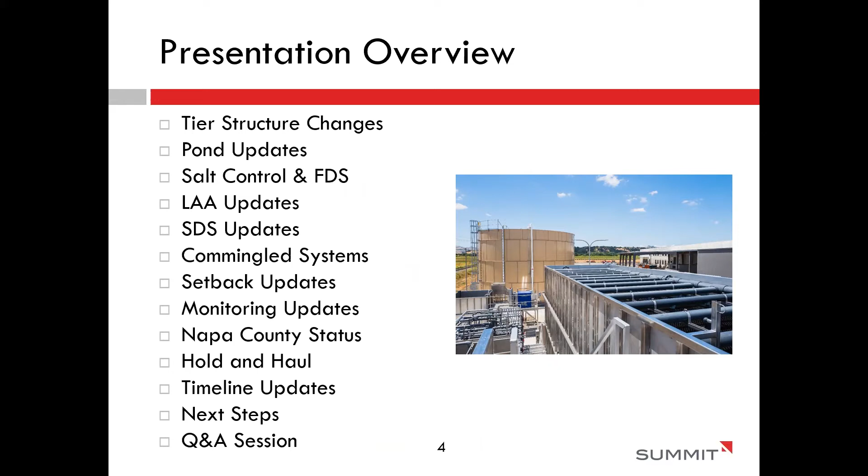Presentation overview. What I'd like to do, because we did go into detail on the draft order at our last webinar, I want to talk more about what the changes are since the July draft, the changes that were presented in the December draft, and the subsequent changes before the hearing.

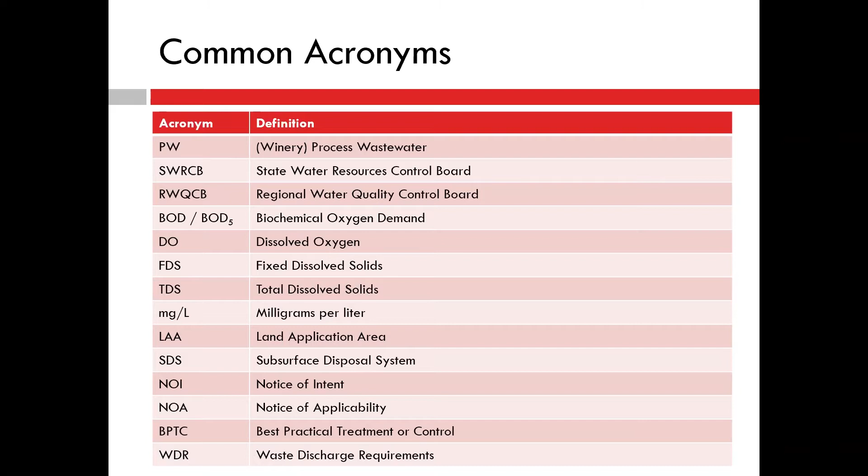So as I was saying, most of you are probably familiar with some of these acronyms. If not, don't worry about it. We can have a follow-up conversation. Not trying to complicate the matter, but using the acronym is oftentimes a lot easier than saying all of the words involved. Okay, so tier structure.

There were some modifications to the tier structure, and what they called previously de minimis is now considered exempt. If your facility is considered to be exempt, you do not need to apply for enrollment in the general order. So what facilities qualify for exempt status? That would be a facility that produces less than or equal to 10,000 gallons of processed wastewater per year.

What is processed wastewater? The state is considering processed wastewater to be any wastewater associated with the winemaking process that's collected and sent to your processed wastewater system. That can be inclusive of stormwater that is also collected and sent to your wastewater system. So it's a combination of any water, wastewater that is collected and sent to the wastewater system.

So one thing we're talking with clients about is adding flow meters, so you know how much wastewater you're actually sending to your wastewater system, and what that data looks like, because the state, especially for the higher tier facilities, is going to be looking for actual data versus theoretical data. And it's always more accurate. Oftentimes the theoretical data can overestimate what your actual process waste volumes are going to be. So I'm encouraging all facilities, if they can, to install flow meters. And if you need assistance with where to locate that flow meter, please ask us.

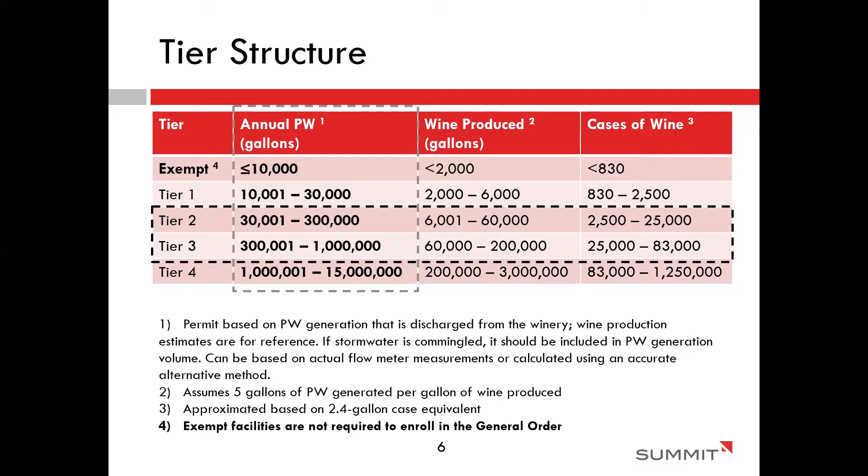All right, so reiterating from last time, nothing's really changed here in terms of what the state is concerned about. Primarily, they're looking at waste discharge to land. So they're concerned about excessive BOD loading, biochemical oxygen demand. So if you're not keeping your wastewater system in good biological health, you can have nuisance odors or anaerobic conditions, and they don't want that. If there's excessive BOD in the waste discharge, you can mobilize trace metals in the soils.

They're also concerned about nitrogen levels and nitrate leaching into groundwater. So nitrate levels within winery waste is not a huge concern for the state. However, there is ammonia, there is nitrogen in winery wastewater. So they're concerned that once that wastewater is discharged to the soil, nitrate will potentially leach into the groundwater, and the limit that they've proposed is the same as what is imposed for drinking water, a cap of nitrate MCL of 10 milligrams per liter. So that's their focus on nitrogen.

They're also concerned about salinity. It's become a hot topic within the state. Primarily fixed dissolved solids, because the TDS consists of volatile and fixed dissolved solids. Volatile dissolved solids are biodegradable, whereas fixed are the salts, and they're not biodegradable. They'll accumulate in the soil, and they're concerned about the impact of the salts on the soil and the hydraulic conductivity.

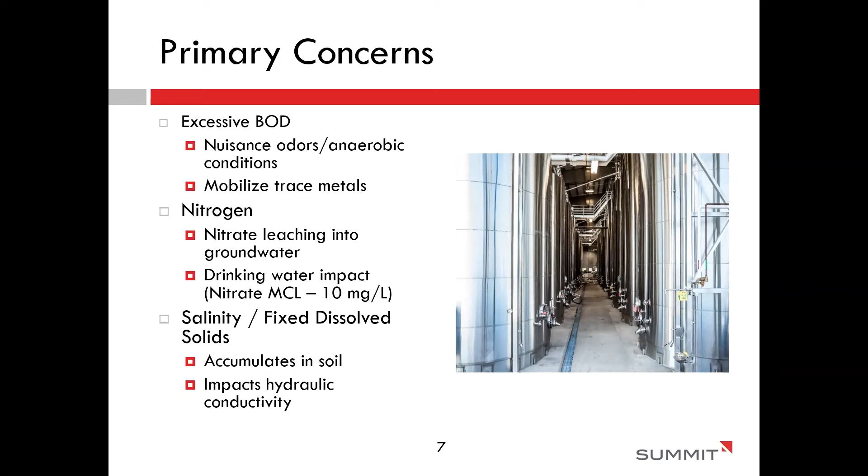Okay, so ponds. Every facility has either ponds, a package system, or a leach field system. And so this general order is going to apply to all of you differently. So for ponds, like last time, it was consistent through the draft and adopted order. They want to understand the sizing of your pond. What is the capacity of your pond? And what is the land application area that's required based on your process waste volume generated?

So for existing ponds, they're not as concerned with those for tier 1 and tier 2 facilities needing to meet the new criteria. Those ponds are going to be approved as is from a capacity and liner standpoint, but they are going to keep an eye on groundwater monitoring just to make sure there isn't a degradation happening to groundwater. If there is, then they might impose more restrictions. But to start, for tier 1 and tier 2 facilities that have existing ponds, the requirements are going to be more lenient.

For tiers 3 and 4, the state is going to require an evaluation of the liner to make sure the permeability isn't higher than what's allowed. And they're going to want to make sure that the ponds are sized to meet a set of criteria, mainly the 100-year storm event. So for existing facilities that have existing ponds, we would go through the process, as part of the enrollment application, to look at the capacity of the ponds and to demonstrate that the liner meets the permeability requirements. For new ponds, the state has requirements for tiers 2 through 4 that they're sized to meet a 100-year storm, and that they meet the liner requirement prior to construction.

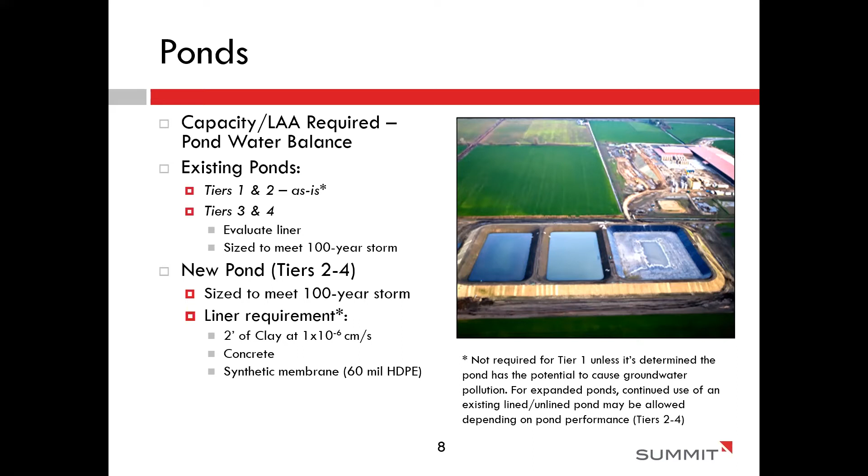One thing that I would like to point out too, that I should have on the previous slide, is that the state acknowledges that if there are too many facilities that would be categorized as a tier 1 facility and it's in a concentrated area, they could move you into the tier 2 category. We don't know what their criteria is going to be, what densely populated means, but that's something to be aware of that we'll be in communication with the state in regards to.

So some additional pond considerations. This order specifically prohibits discharge to a spreading basin, rapid infiltration basin, etc. They're solely looking at wastewater ponds. If you have any of those other types of systems, that will require an individual waste discharge requirement or enrollment specific to your facility. The other thing is the state isn't looking at a wastewater treatment pond any differently; they're looking at a holding pond or an equalization pond just as they would a treatment pond. They're going to impose the same requirements on any type of pond that's holding wastewater or effluent.

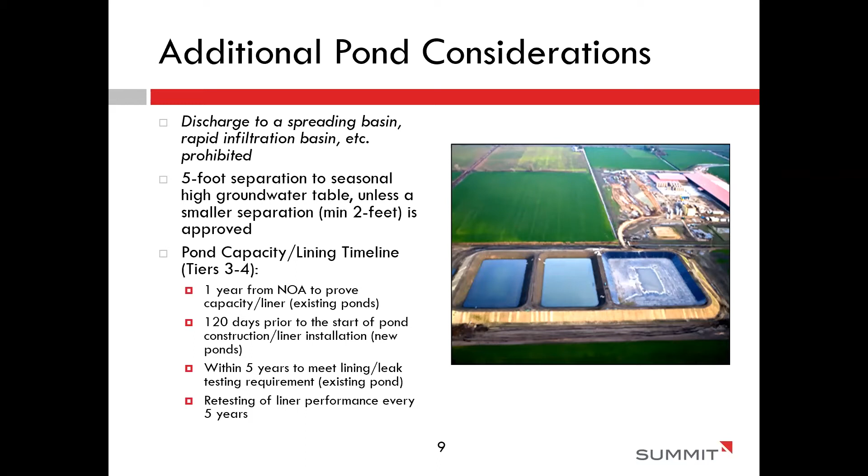Within 5 years, facilities need to show that they're meeting the leak testing requirement for existing ponds. And then for all facilities, you have to retest the liner to show that you're meeting the leak testing requirements every 5 years. That can be quite costly, so it is something to consider when you're looking at your operating and maintenance budgets. One other thing that I skipped over: the state is also going to be looking for a demonstration that you have provided 5 feet of separation from the bottom of the pond to a high groundwater table, unless a smaller separation, minimum of 2 feet, is approved, and that'll be done on a case-by-case basis.

So from your pond, from your package treatment system, then what happens? You discharge to what they call a land application area. So based on what was adopted, there is no specific hydraulic limit. And so this was one concession, because they used to have a hydraulic limit in there. They're just asking that you demonstrate that you are providing good irrigation practices. And that's up to the engineer, whoever is helping you put together the application, to demonstrate.

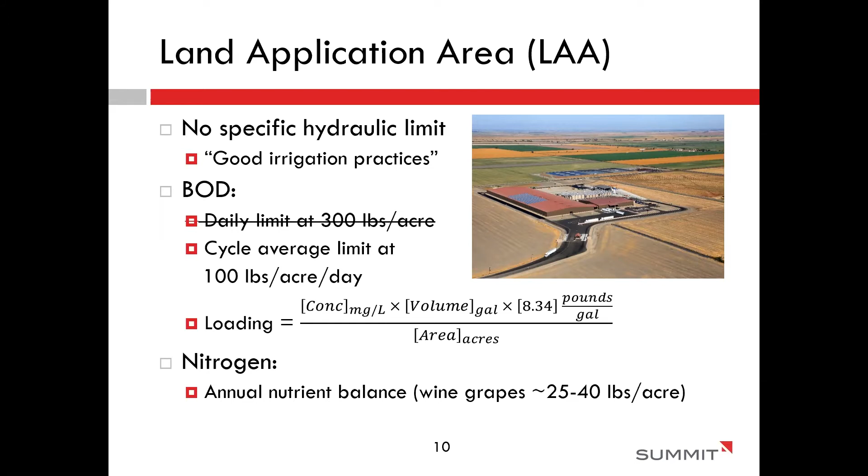For the land application areas, they're also looking at your biological oxygen demand loading. Previously in the draft order, they were looking at a daily limit for BOD, but they've removed that. And now they're just looking at a cycle average limit of 100 pounds of BOD per acre per day. So this was one concession that they made. They're also looking for you to demonstrate that you're applying nitrogen at agronomic rates, which is going to be dependent on whatever crop it is that you're irrigating. And we'll be able to demonstrate this through an annual nutrient balance that will be a part of the technical report.

So facilities that don't have ponds, they don't have package systems, they're not worried about surface disposal. A lot of facilities have leach field systems, or what the state is referring to as subsurface disposal systems. And this is a hot topic as well, because a lot of facilities have commingled systems. They aren't having to do any pretreatment. And so we'll get into what is going to be required for those facilities.

So in general, all subsurface disposal systems are required to demonstrate that you have a hydraulic loading limit of 1 gallon per square foot per day. This is kind of getting into the weeds of things, but this differs pretty heavily from what the local regulatory requirements are, at least for Napa, Sonoma County, and many other county jurisdictions who typically oversee the design criteria for these systems. So that'll be something to look at.

And if you have any design information on your existing leach fields, that would be something we would want to confirm: what is the actual hydraulic loading limit in how the system was designed, and does it meet this new state requirement? Another big item related to SDS systems are the effluent limits. And this specifically applies to tiers 2, 3, and 4. Tier 1 is exempt. Effluent limits that are being imposed are BOD, total nitrogen, and TSS. As of now, those limits have been imposed on SDS systems.

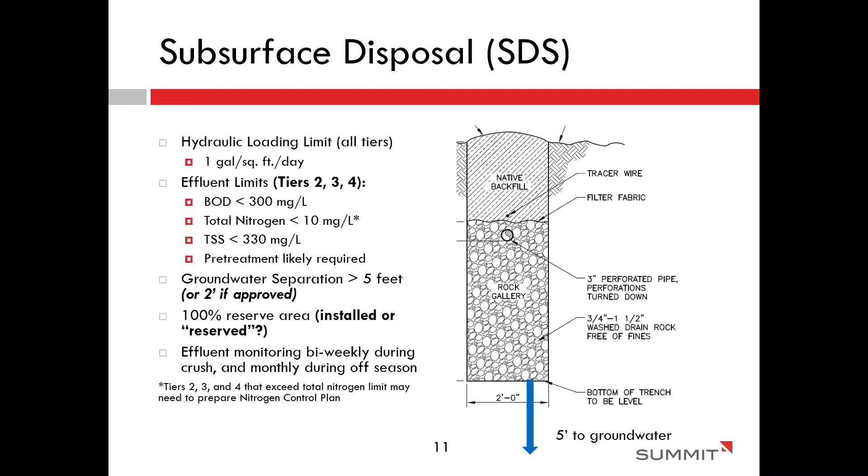Okay, so commingled systems. A lot of facilities combine their process wastewater with their domestic wastewater. And this can continue to be allowed for existing and new. This was a big concession because it was not allowed in previous drafts. But process waste must be pretreated before you commingle and the two waste streams are discharged to the subsurface system. That will be a requirement. The other requirement that is a big deal is you will need to demonstrate that 5 feet of groundwater separation standards will be met. They will not allow the reduction to 2 feet for commingled systems.

If you do want to proceed with continuing to utilize your commingled system, the discharger must also submit technical justification that demonstrates that the subsurface disposal area is appropriately sized and designed. This is somewhat vague. They don't give the design criteria. That will likely fall to the engineer to demonstrate sufficient criteria for that subsurface disposal design.

The other thing that they noted for commingled systems is that dual coverage will be required. So you will be required to enroll in the general order as well as have a septic permit through the local authority. So the alternative to commingling, or pre-treating process waste, combining, and then discharging a commingled waste stream, is to keep those waste streams separate.

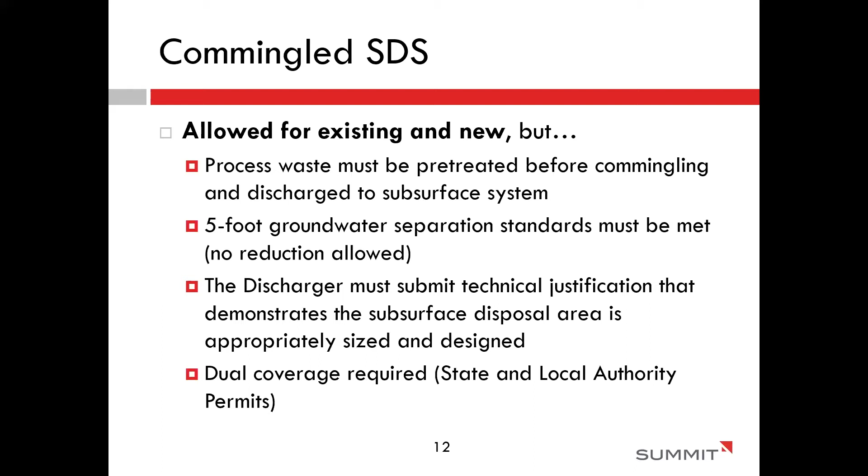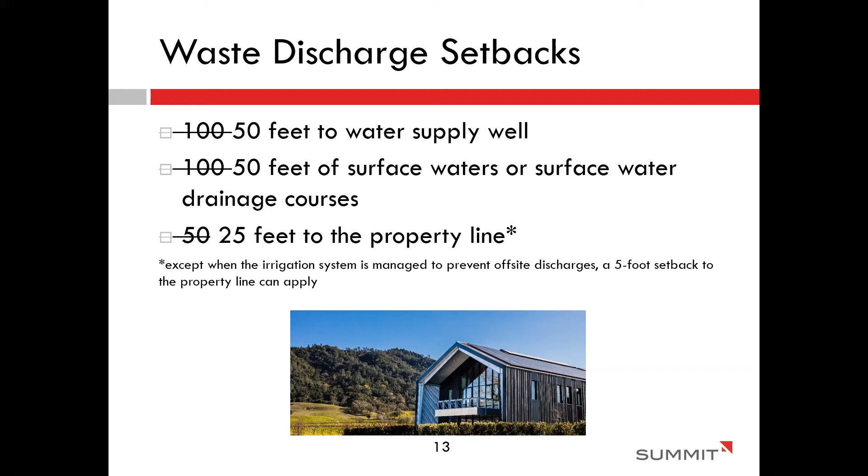A few other concessions in regards to waste discharge setbacks. They reduce the setback for wastewater disposal from 100 to 50 feet to a water supply well and to surface waters or surface water drainage courses. They also reduce the setback to a property line from 50 to 25 feet. And if you can demonstrate that your irrigation system can be managed such that there won't be any runoff and you can keep everything on site, they will allow a reduction to a 5-foot setback to the property line.

Salinity. Salinity is a big deal, like I mentioned earlier, and the monitoring of salinity applies to land application areas, so surface disposal as well as subsurface disposal systems. One other item that was a huge topic of discussion: originally they said you could not discharge water softener, RO backwash, boiler blowdown, but they've since modified, and what was adopted is they're only prohibiting the discharge of water softener backwash into the process waste system or to land discharge. RO backwash and boiler blowdown is allowed.

What they're looking for there is they don't want any additive salt systems or additive salts to be added to the process waste stream. They will allow any processes that are just removing salts from the water sources. So how are they imposing these salinity requirements? What the state's looking for are the fixed dissolved solids levels. And what they've outlined is that you're meeting the threshold. So what is the source water FDS level, or the salt level in the source water, your well water, plus 320 milligrams per liter? Does your effluent meet that threshold?

If not, they will require a salt control plan that you will need to implement in terms of source control or other measures to demonstrate how you are going to be able to meet that threshold. So what does this require? Well, you're going to need to demonstrate what the FDS levels and TDS levels are in your source water, because currently you're likely not monitoring that. So my recommendation would be to get a good handle on what those levels are in your well water so that you know where you stand in terms of meeting that threshold or not.

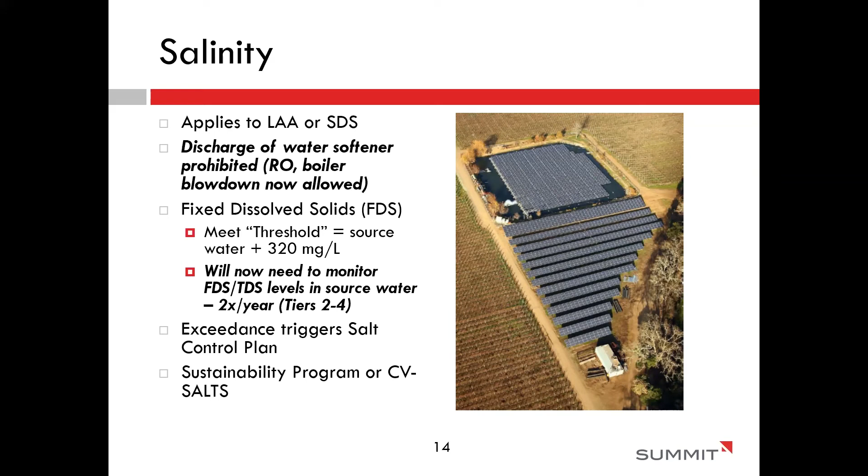Additionally, like I mentioned, the exceedance of that threshold triggers a salt control plan. If you are involved with a sustainability program or the CV-SALTS program, there could be some concessions in terms of what salinity requirements you need to meet.

Monitoring updates. So a big part of this general order is there is a lot of monitoring that's required. So this is time consuming. It's a huge expense for facilities. So it's something that you should be aware of and plan on, as it will impact your budgets. Overall, some general sampling and monitoring requirements are winery effluent. So before it goes to treatment, facilities that fall in the tiers 2 to 4 categories will have effluent monitoring requirements, a number of constituents you'll need to test for. For tier 1, you don't need to do that effluent monitoring, you only need to monitor flow.

Pond monitoring is required for tiers 2 to 4 facilities. Land application monitoring is required for tiers 2 to 4. So what are you discharging to land? The effluent, or what's being sent to subsurface disposal systems, for tiers 2 to 4, and solids monitoring. So there are a lot of different points in your waste stream that are now going to be required as far as sampling and monitoring goes.

Similarly, just separate from the waste stream, there are going to be groundwater monitoring requirements. And this applies to pond systems, land application areas, and subsurface disposal systems. This mainly applies to tier 4. Tier 4 groundwater monitoring is required. There are some exemptions, which we'll talk about later, but it is typically going to be required.

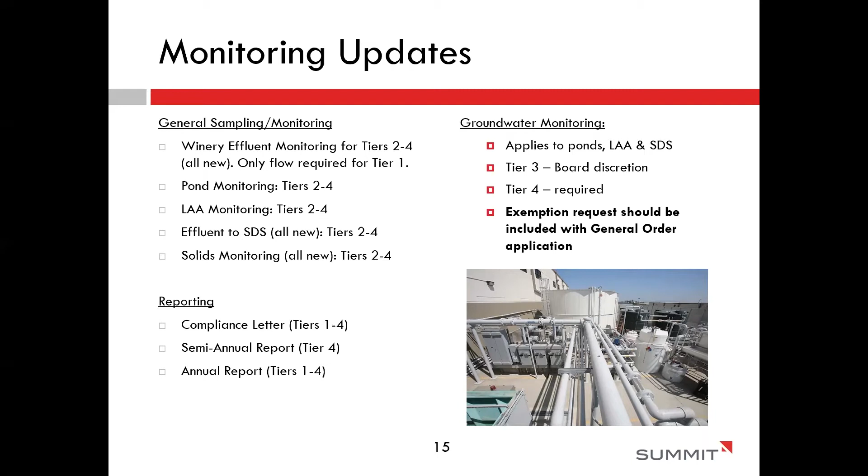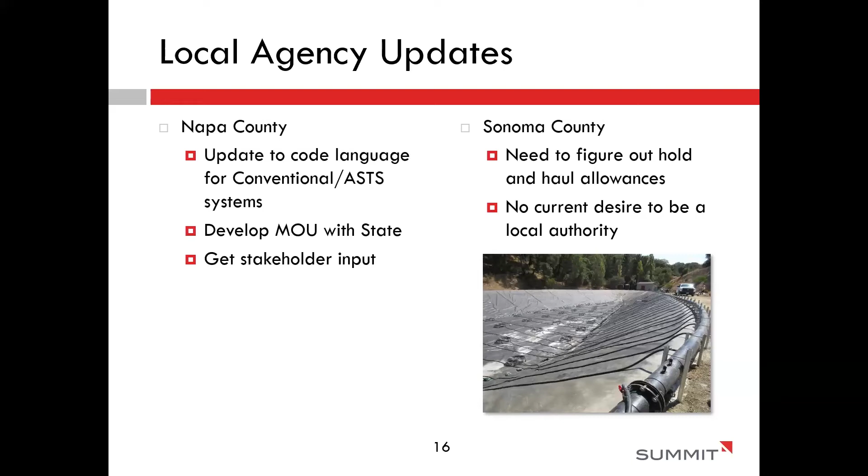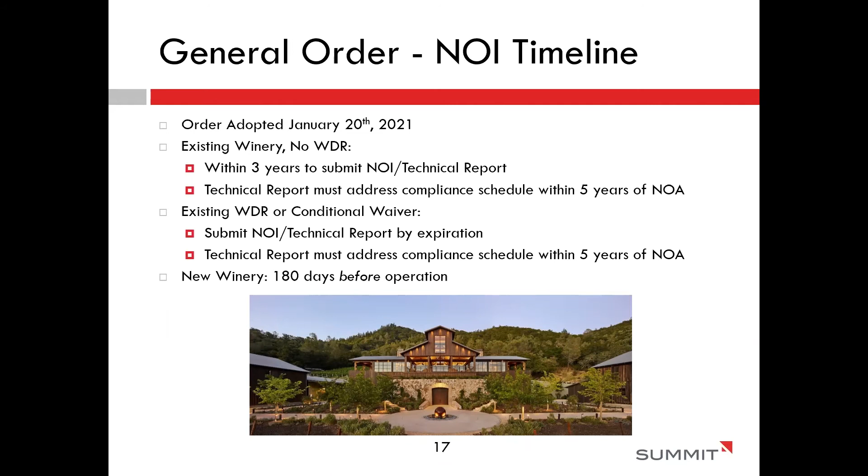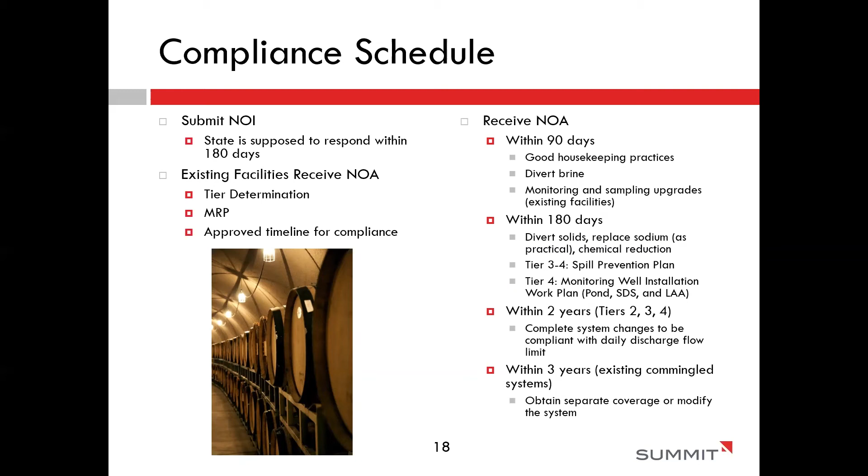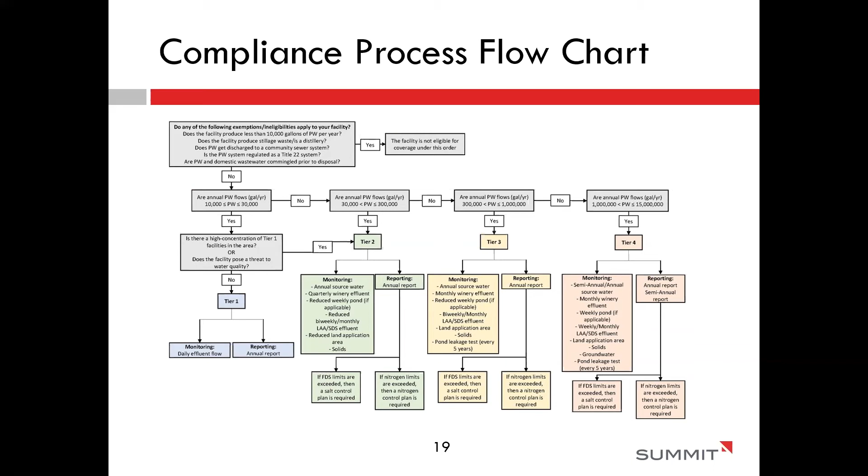I'm not going to go into too much detail on this slide, but this is a resource that we'll be sending out to everybody as a flow chart to kind of make this process less complicated, because there are a lot of nuances and if this, then this parts about this general order. So this flow chart, we'll provide it to you so that we can help kind of walk you through the process. You know, what makes you exempt? What are your flows? If your flows are 30,000 to 300,000 gallons, what does that mean for my facility in terms of monitoring, reporting? So hopefully this will be a useful tool for all of you, and we will share that shortly after this presentation.